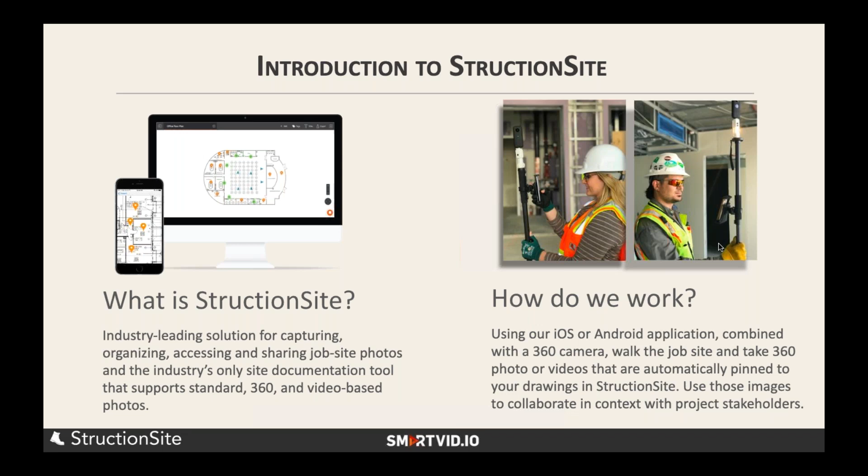So we solved this by giving builders three main capture workflows: standard flat photos from your mobile device that have a position and direction, so you know which wall you're looking at; static 360 photos, for when you want the highest quality image and don't mind the extra time to locate yourself on the drawing for each shot; and finally our latest addition, video walk, where the user simply specifies a starting and ending location on the drawing, and we record 360 video.

The main benefits our customers are getting - first and most obvious is complete visibility in 360, being able to see everything in a single shot: walls, ceilings. That's also why SmartVid's AI is able to detect quite a bit, because you're getting so much more information. It's an obvious benefit for any 360 solution, but I think it really pairs nicely with what SmartVid is doing.

Production tracking - even without real automation, customers are getting a ton of value from having this digital twin of their job site that they can access from anywhere. Warranty and claims, which Chris is going to talk about a bit in his section, but great documentation is basically guaranteed to save you money on warranty and claim issues that arise both during construction and after the project is closed out.

And then there's the owner deliverable. For the builders on this call today, I want to urge you to consider that you might be missing an opportunity to create a lot of value for your client by delivering a tool like StructionSite to them at the end of the project, using something like X-ray mode to see through walls and slabs well after the project has closed out and is in operations.

I'm going to jump to the next slide here. Cool, got it.

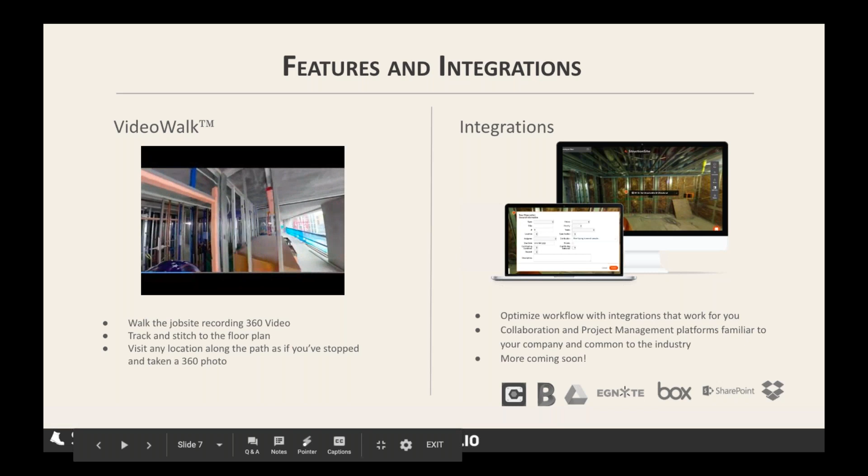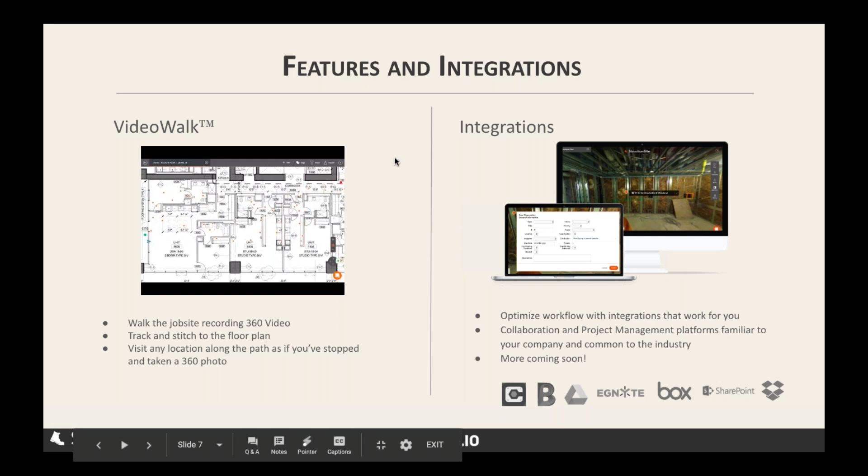The video on the left shows what a raw input might look like for a 360 video walk, then it transitions to show what the resulting path would look like on a drawing and how you can jump into that path and navigate around. The last thing you'll see in that video is a Procore integration, where your user can create an RFI or an observation directly within a 360 photo - an integration we're also excited to bring to the BIM 360 platform.

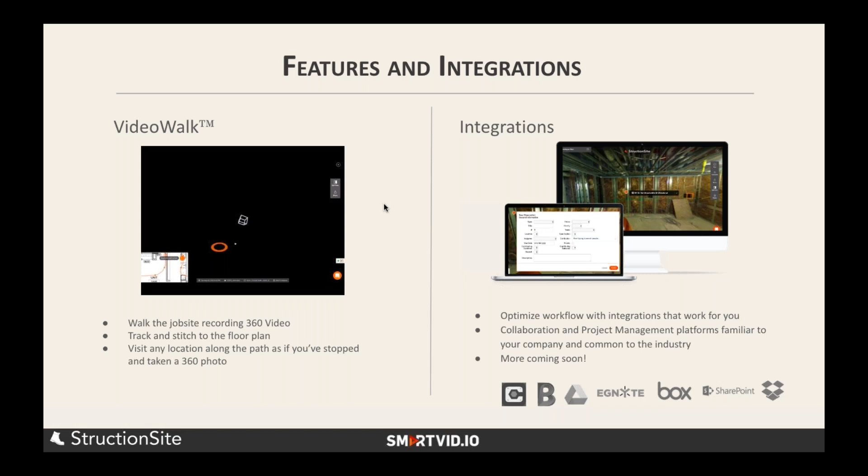As I mentioned earlier, our discussion with Chris and Ted today, in my eyes, is really just about integration.

It's about getting double the value for the effort that you put into your site documentation. Instead of letting pictures go in a folder to die somewhere, it's getting a time machine for your job site from StructionSite, and an incredibly powerful risk and safety tool from SmartVid.

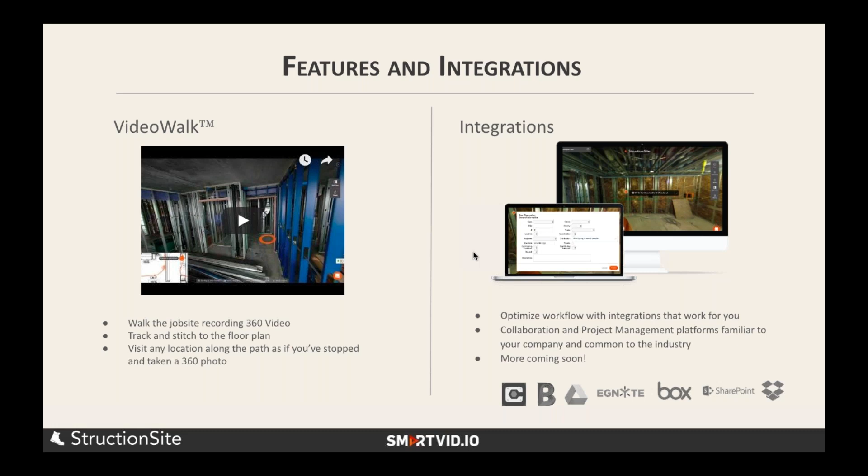Appreciate it, Matt. Yeah, we share the same enthusiasm. The industry has evolved a lot, as we both know, over the last 10, 15 years. The fact that we can be sharing data like this and creating a solution that works in such a seamless way for our customers is really an exciting sign of the times, of where everything has evolved.

So I'm now going to take a few slides to talk about SmartVid, introduce us, and then we'll get into the details of the implementations here. Our mission is to reduce risk in the AEC industry by applying artificial intelligence to address areas of safety, quality, and productivity—those three key areas of project delivery risk.

We focus a lot on safety. There's a ton to chew on in terms of what you can see in your construction imagery and how that can be used as leading indicators of construction risk. That's really what we're getting at here: how do you use all that imagery and actually turn it into actionable insight?

So there's a ton of imagery out there. It's all over the place—StructionSite, OxBlue site cameras, Procore, Autodesk, Oracle. There's so much photo documentation being taken, and whether it sits in a folder someplace, or gets stuck somewhere in an album in a construction management system, there's a lot of value that's actually in there that's not being tapped into.

So I think a key point here is: why shouldn't you use powerful AI in an automated way to try and get as much data as you can out of the imagery you're already collecting? It's happening on your jobs, and you can actually get more value out of it.

So the question is, what do you do with that data? It's not just finding photos. Actually, I think a key point here, a really important point, is it's about creating metrics. We're going to finish off here, and Ted from Barton Malow is going to share with us some metrics from Barton Malow generated from Vinnie on some of their projects.

It's looking at all your photos, looking for stuff like how much work at height is going on, how many ladders are being used, how much housekeeping do I see, and yes, PPE compliance. But the real goal here is to focus on risk and on those projects that may be entering riskier phases or may have riskier situations going on.

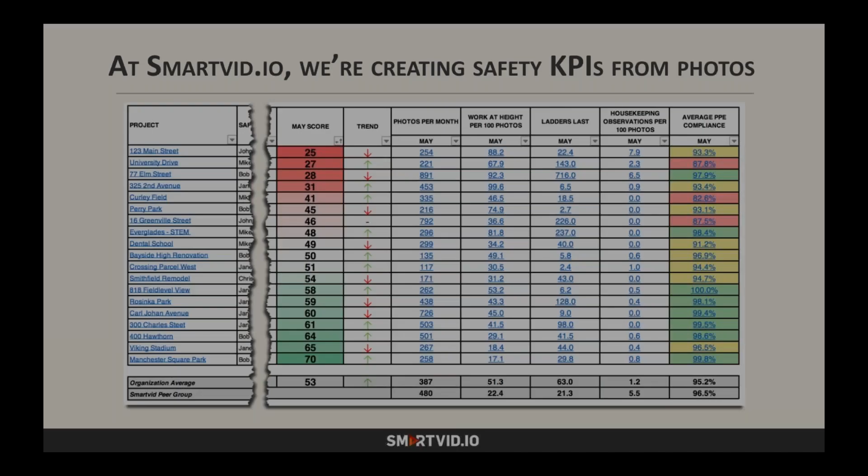The goal of Vinny is not to nail somebody. It's not to write somebody up for not wearing gloves. It's to create risk data that you can use to focus attention, not to nail any one individual. And I think that's a really key point. It's about the data and about focusing on where your risk is.

So with that as my last slide, let's bring in Chris Bays from Hawaiian Dredging. He's going to take us through Hawaiian Dredging, a little background of the company so you know who they are, and then get into the specifics of how StructionSite is used, how SmartVid is used, and we'll get into some real live results. Chris, welcome on.

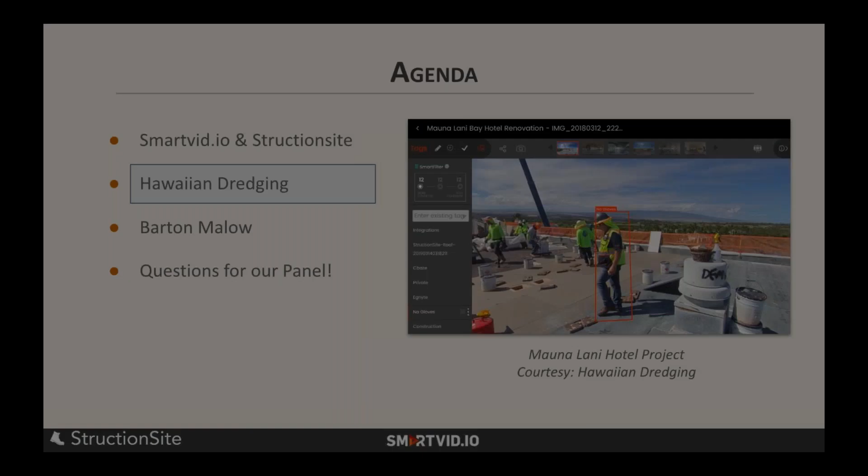If you want to jump to the next slide. So we have a building division, a commercial division, heavy division, roads, bridges, we have waterfront and foundation, and we have a power and industrial division. Our business model is that we really do any type of large construction work in the state of Hawaii. We started doing work in Guam recently, but we're limited to this geographical area. We've been established here for a long time. The name of the company is Hawaiian Dredging because we got started by dredging Pearl Harbor over 100 years ago. So that's just a little bit of background of what Hawaiian Dredging is.

Yeah, we keep getting asked how much dredging is going on in Hawaii, and also can we go visit Hawaiian Dredging? That's the other question we get asked a lot.

So I think we're going to just talk to those points about SmartVid in action here as this video plays. In the background, this is a video of the actual StructionSite interface, all web-based, so there's no software to install, purely running on a web interface. We've been using StructionSite for a little over 2 years now, and we recently used our first project where we combine both StructionSite and SmartVid.io.

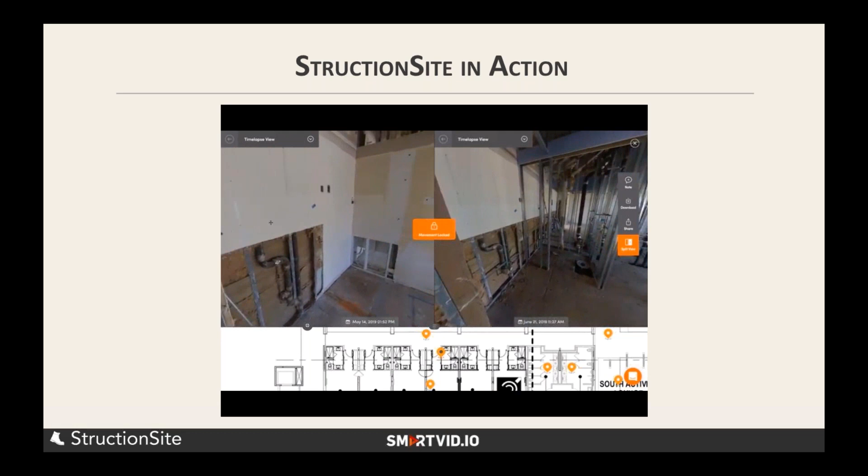This data is valuable for many things. One of the things our job site team is particularly excited about is warranty work. If you have a leak or something going wrong, you can only get so much information looking at what it looks like now. You really need to go back in time and say, okay, where could this problem be originating from. And it's really kind of changed things.

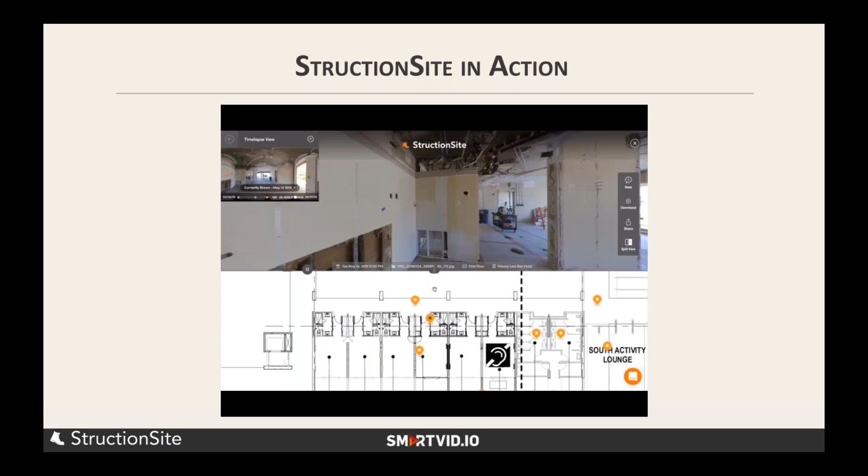It was mentioned earlier that usually you've got folders of hundreds of job site photos that are somewhat disorganized. This changes the workflow to go to location first and then time, rather than date and then location. That's a huge shift because it makes things way easier. You have a problem in a particular location, you know where that photo is. You go in, click on that button, and then it's just a matter of scrubbing through the timeline view to find out what was in place at that particular location before the wall was closed.

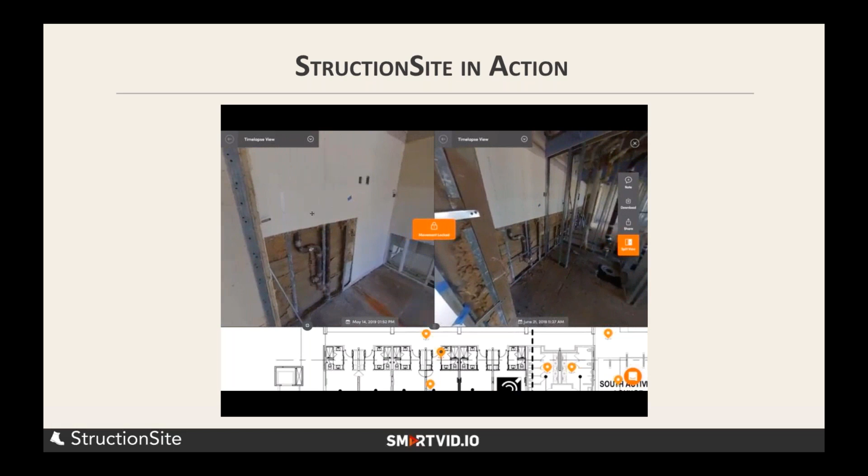With SmartVid.io, you really get this synergy created by the two products. If you're capturing in Struction Site and set up this integration, all the data automatically feeds into SmartVid.io. There's no manual work for that at all. So we're getting hundreds of photos per week that we'd be taking for Struction Site anyway, and we get the automatic benefit of having those photos analyzed in SmartVid.io, plus a lot of additional insight and information from them.

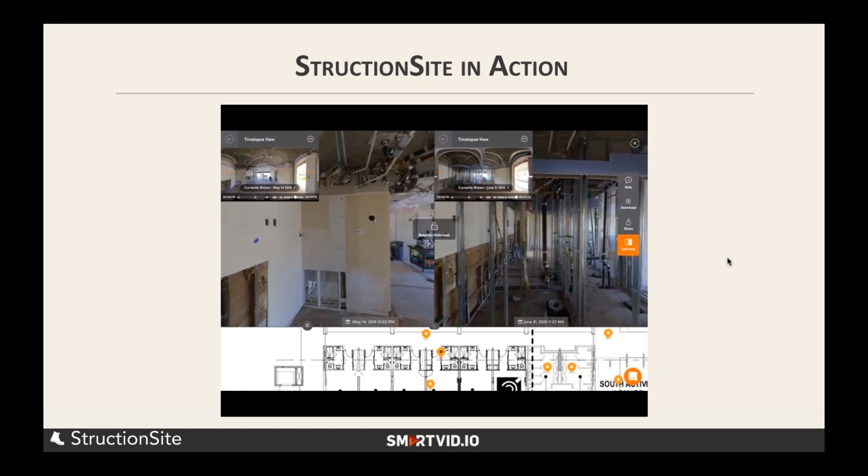You want to jump to the next slide for me? Yep, there you go. Okay, so this is kind of a recap of some of this.

With the integration, we started this safety monitoring at the beginning of this hotel renovation job, and there's also a mobile app. So if you don't have the 360 camera on you, you can take out your smartphone and snap pictures of things, and those feed directly into SmartVid.io and/or Struction Site as well.

We took over 600 photos in the last month, and with the 360 camera we have someone doing this regularly, and I think that's really how you maximize the value of software like this. If you have it set up and people are indiscriminately taking photos every now and then, you can get some value. But if you really have a structure set up where you're capturing regularly and getting content online regularly, then you can get a lot more value from this.

On this one job site, we've taken a few thousand images now, with someone going out with a 360 camera once or twice a week to capture the entire property. This is a big several-hundred-thousand-square-foot hotel, and to capture the entire property takes about half a day with the 360 camera, capturing about 200 images in about 4 hours. That averages out to a photo roughly every minute or so when doing it with a 360 camera.

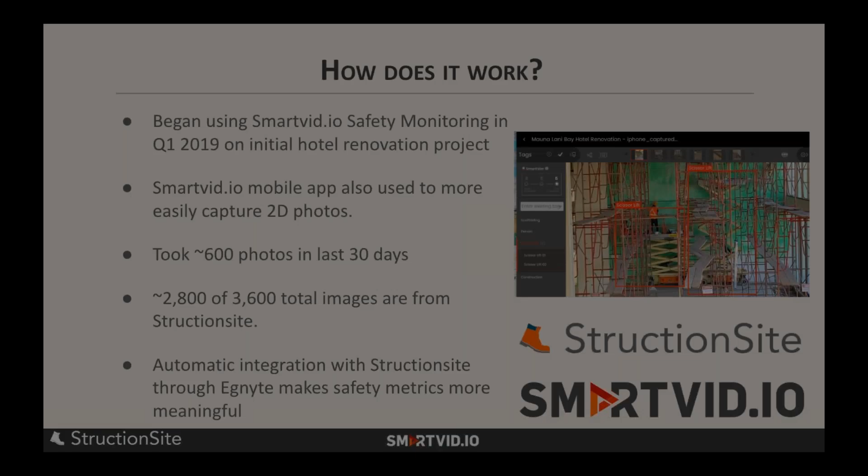So for the integration, we used Egnyte. There are several options - if you already have Box or Google Drive set up, there are several ways to do it. But basically, we take photos using the Struction Site app, and Egnyte automatically goes in and grabs all those photos. Then SmartVid.io is able to jump into Egnyte and pull the photos. So once set up, it's really a set-it-and-forget-it kind of thing. I actually set up this integration myself - it took less than 5 minutes to start with, and I haven't had to look at it since. It's really seamless.

All of your data from Struction Site is automatically getting piped into SmartVid.io, which is really nice - not having to juggle around multiple platforms. It's kind of interesting now, with APIs and the way programs can interface with each other, that data can flow like this. I'm glad you haven't had to look at it since you set it up - that's great to hear.

So in terms of what Vinny is seeing in the images, we have some examples here actually from the project, from the hotel project, and then I'm going to jump into the software and show folks how the AI finds stuff in a 360 sphere and zooms around.

So what is Vinny looking for? Well, what Hawaiian Dredging is doing is using some of our standard safety monitoring type observations, where we're looking for signals of risk. There's a whole bunch of different stuff that Vinny looks for - you may hear me call them tags. It's a way that when Vinny sees something, he applies a tag with also a box around the specific thing.

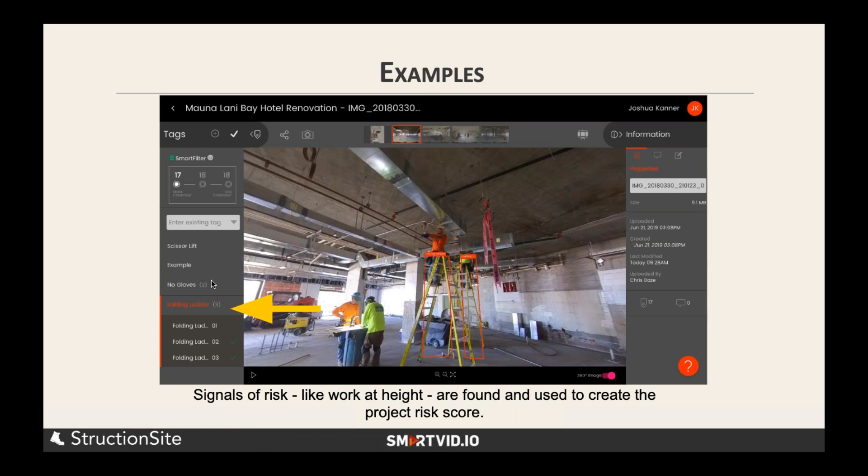So this is an example of a 360 image. Vinny's found some folding ladders, made some observations about workers with gloves or no gloves, and sees a scissor lift in the background. Because this tag is highlighted, you're seeing it in the image there.

Another example, here's a folding ladder that was seen. Sometimes it could reveal an opportunity for an improvement. Folding ladders are not supposed to be leaned up against the wall. But again, this isn't about trying to go and nail this guy. It's just an example of ladders being used, and might be an interesting point in a toolbox talk coming up.

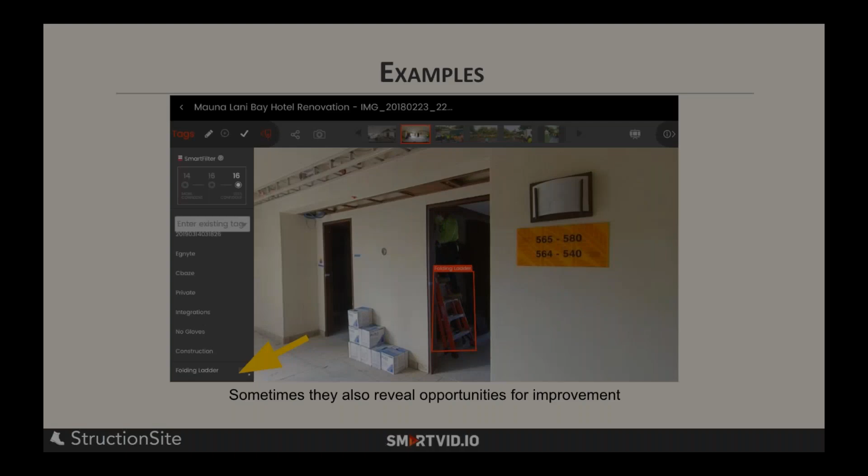Here's another spherical shot from StructionSite, where you're able to see here. Here's a nice example of, because it's about finding both opportunities for positive encouragement too. Here's well done vertical capped rebar. And this is actually a really interesting image because there's a bunch of people in it.

So let me go into the software now live, which is always exciting in a live webinar. Let me just make sure that you guys can see it.

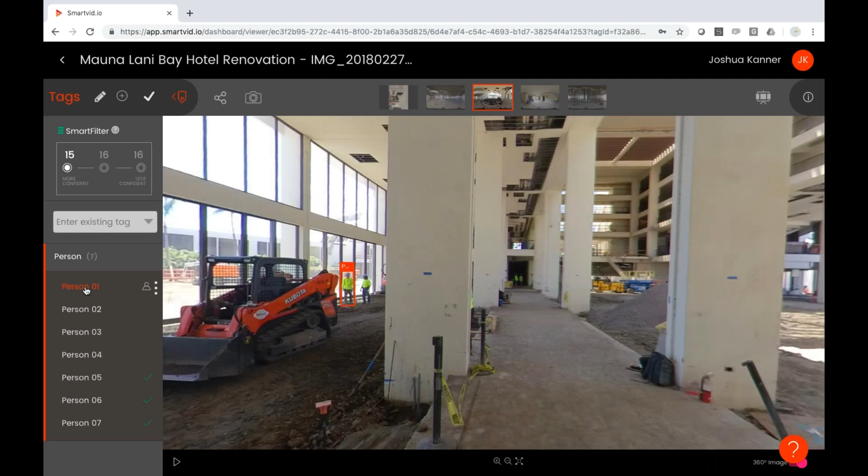And now, as you can see on the left, I am clicking around, and Vinny, we're in the SmartVid.io interface here, but the image came from StructionSite. Vinny has gone through and found all the people in this image, and now I'm just zooming around and looking at them, also identifying if, for example, a particular worker was seen not wearing gloves, which this guy was not. So again, you're not out to nail this guy, but it's a great example of how Vinny is looking at all the various sources of risk in the image and leveraging the data you already have.

So I'll expand on that glove comment a little bit. We actually, at Hawaiian Dredging, implemented a glove policy on our job sites about a couple of years ago now. And as mentioned, it's not about busting and saying, hey, you didn't comply with our rules, and we're tracking that. It's more about keeping an eye on the culture, how seriously are our employees taking this glove policy that we implemented on a job site by job site basis.

Understanding the culture of a job site, really the only way to do that in the past is to be on that job site and actually walk the site every day and see, okay, what's going on, who's doing what. And now with this platform, we have a way to keep an eye on that kind of from the executive level or off job site level.

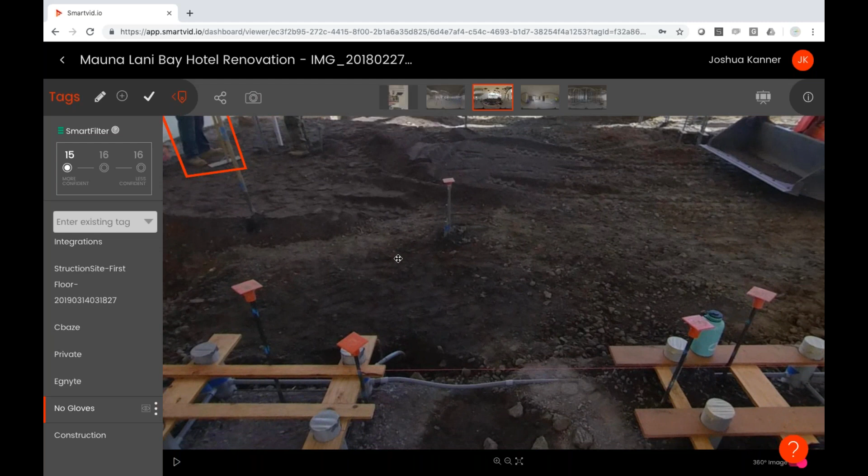These photos are kind of telling a story. How is the job site progressing? Who's doing what? And those KPIs, just keeping an eye on how different safety aspects are shifting on the job site, how they're improving, how they're not improving. That's the real value for us in SmartVid.io.

That's great. Thanks, Chris.

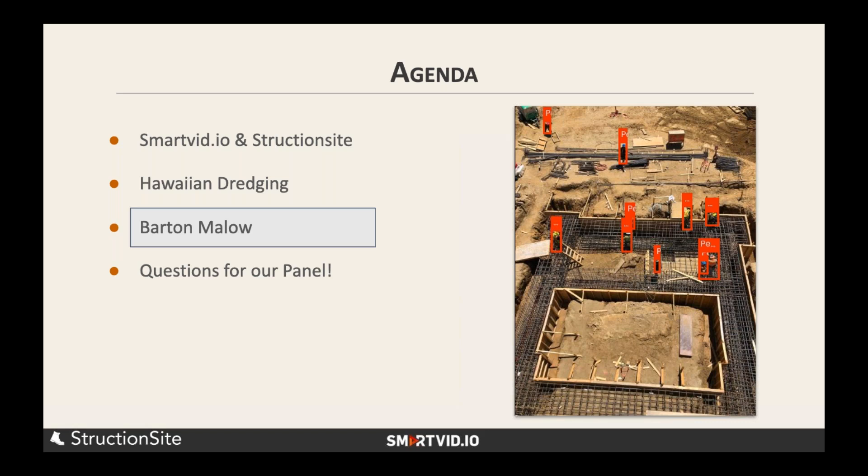Great, I'm going to go back into the slides here, and we will keep this rolling along. Chris will be a part of the Q&A and discussion we have at the end, so we'll all come back together. But before we get there, let's welcome Ted on to talk about Barton Malow and similarly walk through the experiences of using both products together. And with Ted, we'll also get into some of the analytics and reports that are being generated.

Ted, welcome on. Great, thank you, Josh. So just a quick intro to Barton Malow. Barton Malow has been in operation for 95 years. We have 14 offices across 10 different states, and we operate in a large number of markets, spanning from education to industrial, energy, health, sports, as well as we self-perform a large number of skilled trades. That includes concrete, civil, structural steel, boilermaker work, refractory, rigging, millwright, interiors as well.

So, a very diverse group, and we're very interested in sharing our story of how we implemented StructionSite and SmartVid. If you want to roll to the next slide.

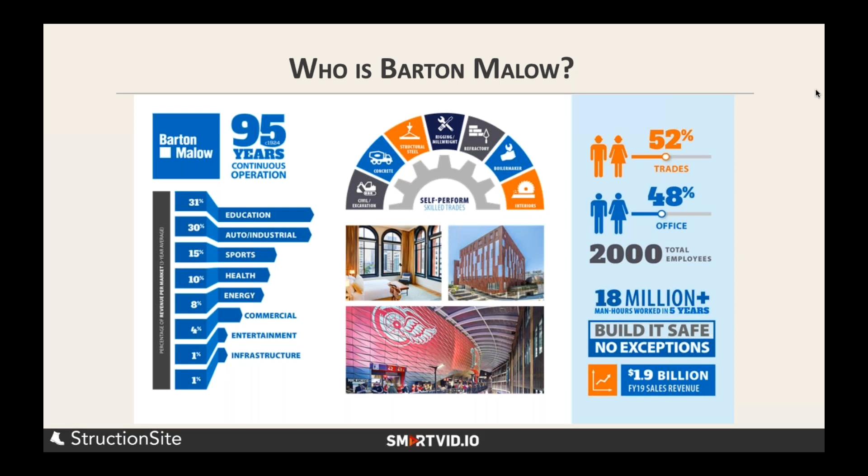We have kind of an interesting story, I think. We started several years ago with 360 cameras, back when bubble cam and GoPro rigs were around, stitching together 6 different GoPro rigs to be able to create 360 video for walkthroughs and those sorts of things.

It was really once StructionSite came on the market that they provided a very simple, effective way of capturing 360 photos and, as Matt mentioned earlier, dropping those photos directly onto your drawings. Now you have the benefit of knowing the context of where and when you took those photos, versus just being buried in a folder structure.

So we've started to deploy that across our organization, and again the biggest benefit there is just the simplicity. All I need to document progress photos or job site photos is my iPhone or mobile device and a 360 camera, like a Ricoh Theta or Insta360.

Our initial focus was going to be on preconstruction. One of the fast, rapid ways we deployed it was across our K-12 and education market, to very quickly and efficiently document schools as well as do pre-con walkthroughs. We've fed that back into progress photos, spreading it across the company, using timeline and other features of the tool to quickly and accurately take progress photos and develop other reports.

If you want to go to next, perfect. All right, so onto our journey with SmartVid. We started in January, and we've been deploying SmartVid across 6 projects that we've been targeting as our initial pilot projects.

The real goal here is to leverage the power of all those photos we're taking, and have those piped from Box, which we're using, to SmartVid to be able to have Vinnie analyze. The benefit is we get trend data to better understand our safety behavior and culture, and focus where we need to focus for various training or risk factors.

The other big benefit for us is the reporting. One of the reports easily generated from SmartVid is hyperlinked back to SmartVid. It develops insights into how many photos you captured for that job, general trend analysis, some compliance information for PPE, as well as other types of risks. It's hyperlinked directly back to SmartVid, so when you click on it, it takes you to those photos to review very quickly and easily.

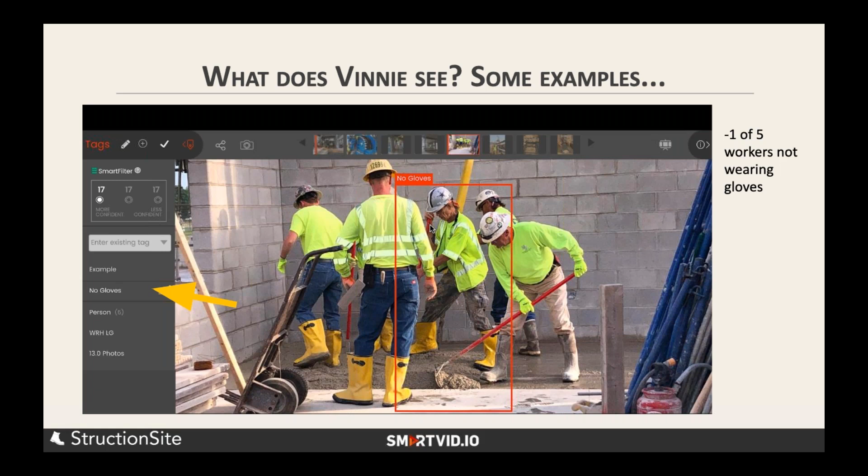Just like we did with Hawaiian Dredging, here's some examples coming out of Barton Malow jobs, to show Vinnie in action. This is an example of a crew—there's one worker seen not wearing gloves there. Again, the point here is not to go nail that guy, but to use it as part of the analytics, which we're going to get into in a second.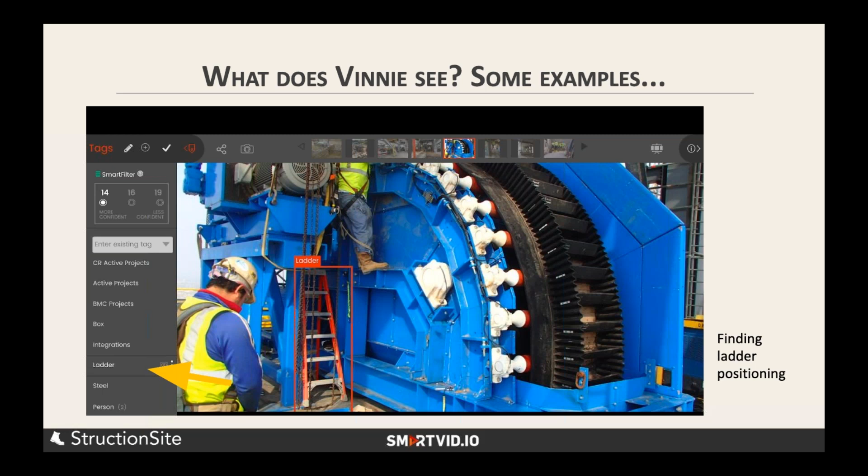But the photos actually wind up being the data. The point here is not for a person to have to go through and review every photo. That's actually the opposite of the point. The point is to create these KPIs, or key performance indicators, that focus on where the risk is.

So Ted, I'm wondering if I could have you talk through a little bit what you've found with the scores, and just the process of thinking about how to get to what Vinnie sees, and then bubbling that up into a risk score for your projects.

Yeah, yep. So one of the outputs of SmartVid is being able to understand this type of data, which is helping us understand, compared to baseline risk factors, where we should be focusing our attention.

You can see their total photos per month. Those are just general information to make sure that we're getting out there and helping document the job, taking photos, and then we're ingesting photos at a healthy rate to be able to make sure that we're feeding Vinnie. Working from height, ladders, and housekeeping are all good baseline observations that we want to understand and make sure that we're tracking.

So the next piece, Ted, is doing some historical analysis, looking at incidents too, and where incidents have happened. And that's one of the neat things about photos and photo analytics, is that a lot of old projects have photos as well as project data. And that's led to some pretty exciting outcomes or observations, where, and I'll introduce this concept, and I'd love to hear your thoughts on it.

Where basically what we've done here is we've charted that score. So if you look at the score here, the lifetime risk score, like here, 32, 41, et cetera, the higher it is, so the more it goes into green, the safer, the less risky Vinnie thinks the job is. The lower the score, the more risky Vinnie thinks the job is.

What have you thought about this stuff, Ted?

So yeah, interesting, great concept where you could apply it to anything, where if you could better understand where your risk lies, and trend that over the life cycle of your project, you'd better be able to analyze that risk and mitigate that risk, because that's what this historical project data is directly pointing at. On future projects now, we can start to chart that risk out, and better manage it so we can understand, are we heading higher into the darker green areas, or starting to trend down into the red, and then better evaluate what corrective actions we can deploy to get us back up into the green.